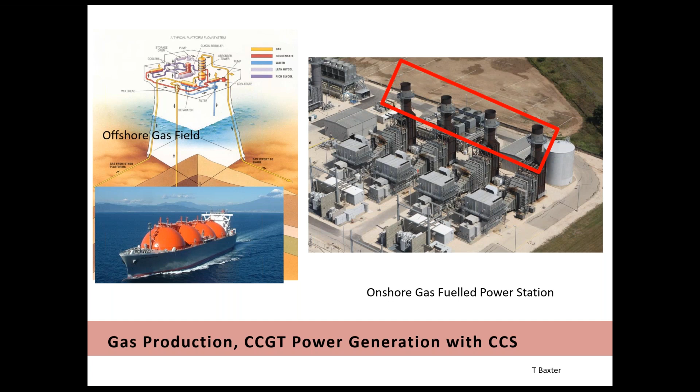Just a little reminder of a combined cycle gas turbine. We have the coupled gas turbine and the air compressor. We ingest air, compress it to combustion temperature, and inject fuel. We get a rapid expansion of the combusted gases, and the energy in the expansion is taken out through a turbine onto an alternator, where we generate electricity. Electricity generation is supplemented by a heat recovery steam generation system, where the heat in the flue gas is used to generate steam to drive a steam turbine coupled to an alternator to give us supplementary electricity.

Now, if we deploy carbon capture and storage on a combined cycle gas turbine, we introduce a parasitic load. This results from using steam that could be used for electricity to help in the recovery process of the carbon dioxide, and using some of the electricity to power the gas compressors, the CO2 compressors, and the ancillary equipment. These two red sources reduce the power output from the power plant, reducing its efficiency. It's an unwelcome introduction for carbon capture, and clearly the lower and more efficient we can make that parasitic load, the better the efficiency of the combined cycle gas turbine generation station will be.

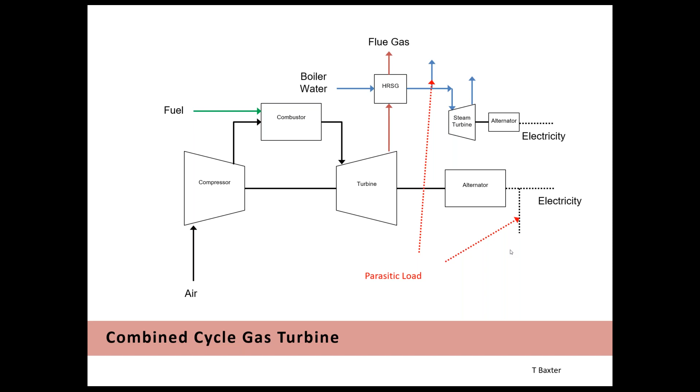So just a little bit of background on combined cycle. In the UK, this is Wales, to the west of England, and down on the south corner here, a little red dot, is the Baglan Bay power station. Baglan Bay has frame 7s and frame 9s, General Electric machines, and as you can see, the thermal efficiency is around 55 to 60%. 60% is actually a very good thermal efficiency for a power station.

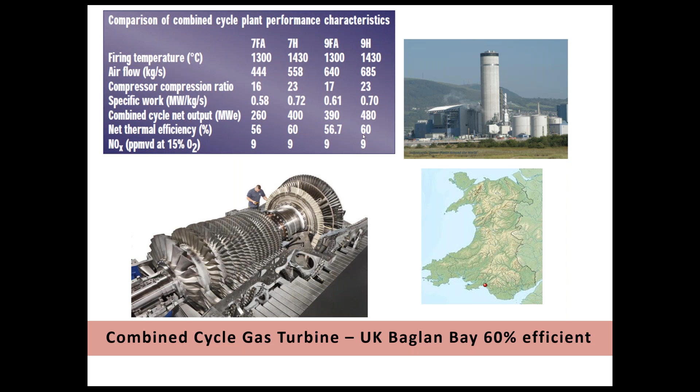Now, this is Petra Nova, one of the built carbon capture plants on a power station. It's actually on a coal-fired power station, but the function of the carbon capture plant is exactly the same as it would be on a gas-powered station. So Petra Nova is near Houston, and you can see the flue gases. This is the amine absorber taking out the flue gases, the amine regenerator releasing the CO2. We have the CO2 compressors, and somewhere there'll be an exit route, an exit pipeline for the CO2. In this particular application, the CO2 isn't used in storage, it's used to enhance oil recovery. So there's a commercial value in the carbon dioxide. The injection of carbon dioxide improves the oil recovery from nearby oil fields. So let's have a further look at the system here.

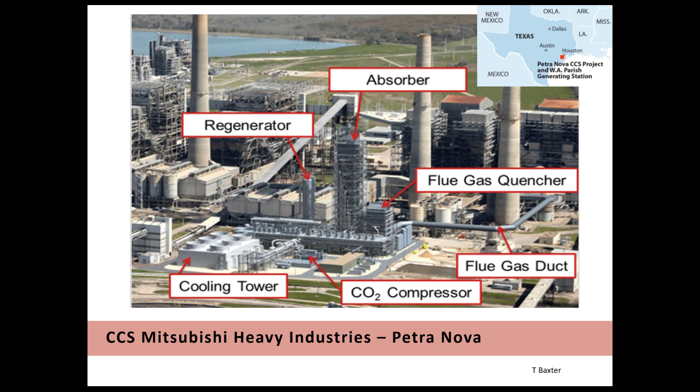So the amine unit. Now we've got here the amine reaction. So we have amine, which is an NH2 radical, that will react with CO2 and bind the CO2 to it.

So let's follow the process flow diagram. We're coming in from the power station, the flue gases, which will quench, will cool. Now we have to increase the pressure to allow the gases to overcome the pressure drop in the contact column, the amine absorber.

So the flue gases with carbon dioxide in them flow upwards. They are met with counterflowing, downflowing amine. It's called lean amine because there's very little carbon dioxide in it. The lean amine captures the CO2, and we have rich amine leaving the bottom of the column. That's amine with the CO2 chemically bound to it.

We then take the rich amine over to a regeneration column. If we follow through, we've got some heat recovery here where the rich amine is heated, and then the heat is further supplemented by a reboiler, and that drives off CO2 and water and some amine, which we condense, reflux, and we have a typical distillation process going on here, a stripping process, where the CO2 is stripped out. The amine and water come to the bottom, and the CO2 at the top goes forward to compression.

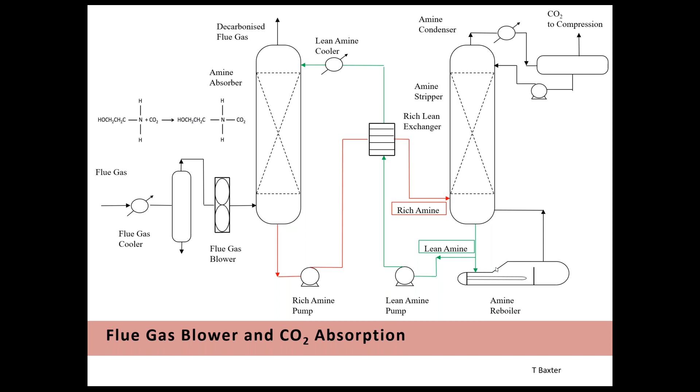And the big energy users are the amine reboiler, the flue gas blower, and these pumps are fairly large too. But the blower and the reboiler are the biggest users.

We then take the CO2 forward, and we're now going to take that to a sequestration site at the top. Generally that's done with an integrally geared compressor. What I've shown you here is 5 stages. So from the amine stripper, this will be around atmospheric pressure, can cool, compress, cool, knock out any liquids, compress again, so second stage compression.

Here we have a dehydrator, and we will remove water. Generally you remove water to prevent corrosion. CO2 and water is a very corrosive mixture, so if there's no water, you tend to have no corrosion. So we'll also have a look at the dehydrator.

But before that, we continue. So 1, 2, 3, 4 stages of compression. At this point, generally you're above 100 bar, and the CO2 is now acting more like a liquid. The last stage often gets the characteristics of a pump. The CO2 is beginning to become more incompressible than the low pressure compressible CO2.

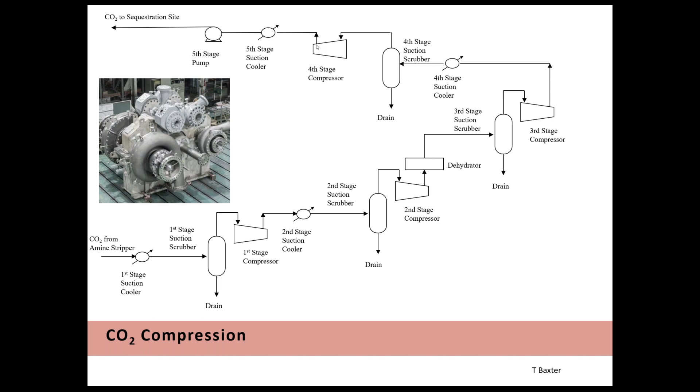Gas dehydration, what I've shown here is a molecular sieve unit. So at the top we have the wet CO2, that's CO2 that's been saturated with water, and we want to remove that water. So we have a 2-bed process or a multi-bed process here. The one I've shown is a simple 2-bed one. One bed is on duty, one bed is regenerating.

So the valves are aligned such that the wet CO2 comes in, this is open, this is closed, and the wet CO2 flows through this desiccant material. It's a metal aluminosilicate, think of it as a general silicate, that will adsorb water. And the process of adsorption is a molecule adsorbing to a solid surface, which is different from absorption into a liquid.

But in time, this bed will become saturated with water and eventually will become ineffective. So before that happens, we have to get this bed offline and drying. So whilst this is adsorbing, this parallel bed is being regenerated.

And what's happening here is around 10 to 15% of the gas is heated, maybe to around 260 centigrade. It's then routed along here and then up, and the hot gases release the water from the molecular sieve solid adsorbent. Then the hot gases with water are taken out, cooled, and the condensed water is taken off.

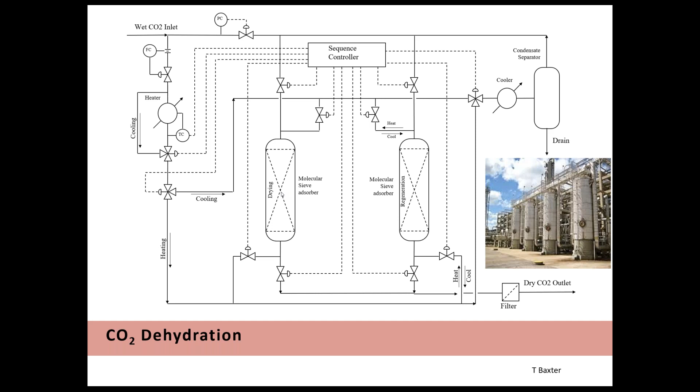So let's do a simple heat and mass balance. I'll assume that we want 1 megawatt of electricity from a combined cycle gas turbine plant, and the thermal efficiency is 55%. We'll also assume that the fuel gas we're using is methane, with a calorific value of 50,000 kilojoules per kilogram. So a simple analysis: 1 megawatt at 55% thermal efficiency using methane results in 0.036 kilograms a second of methane requirement.

If you look at the combustion reaction, for every molecule of methane, I produce 1 molecule of CO2. We know CO2 molecular weight is 44. We know the molecular weight of methane, so we can estimate the amount of carbon dioxide we're producing, which is 0.1 kilograms per second.

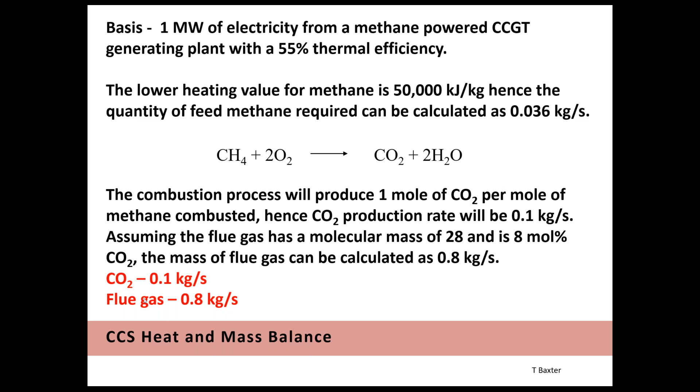Now the flue gas that I'm using, I'm assuming has a molecular weight close to air. It's got a molecular mass of CO2 of 8%. So knowing that CO2 is 0.1 kilogram per second and an 8 mole% concentration in the flue gas, I can calculate the mass of flue gas is 0.8 kilograms per second. So the key numbers here: for every megawatt of power, I'm producing 0.1 kilograms a second of CO2 and 0.8 kilograms a second of flue gas is required as feedstock.

So let's have a look at the blower. That's the compressor, the axial blower compressor that provides an increase in pressure on the flue gas to allow it to overcome the pressure drop in the amine absorber. Typically that will have a discharge pressure of 1.3 bar and a suction close to 1 bar. So we actually have a huge volume at 1 bar atmospheric pressure of flue gas that we have to compress. Although it's to a small pressure, it still requires a lot of energy.

A simple polytropic calculation, as I've shown the equations here, yields 21 kilowatts for that blower. Now remember, we're producing 1,000 kilowatts of electricity. So 21 kilowatts is now a parasitic load - that's 21 kilowatts that we can no longer produce as sales electricity.

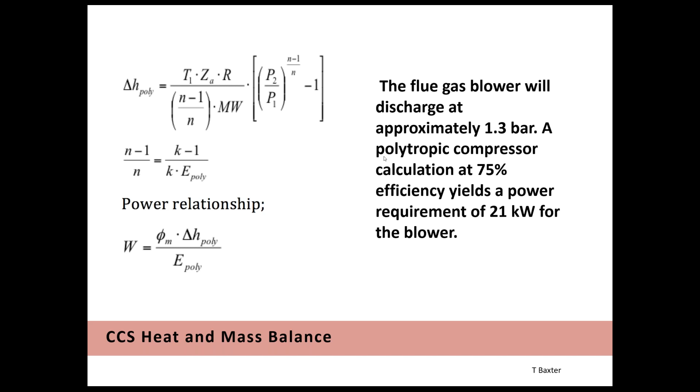Now, what I've done here is for a typical amine reboiler to regenerate the amine to get the CO2 out of it, literature shows that it's around 4 megajoules per kilogram of CO2 of heat requirement. For the numbers that I use, bottom left, I've given a source. I'll provide a PDF of this presentation, which will hopefully be made available to you all, and if you're interested, you can track down my data sources. So 4 megajoules per kilogram of CO2, and I've got 0.1 kilograms a second of CO2.

That means the thermal duty on the reboiler is 400 kilowatts. That's 400 kilowatts I have to supply as steam, and that's 400 kilowatts thermal that now can't be used to generate electricity. So what I've done here is I've used a reboiler that's around 400 kilowatts, and I'm looking at how much steam that uses, and I get a quantity of steam of 36 kilogram moles per hour. That's steam that, as I said, we can't use for electricity.

I now take that steam to a steam turbine to calculate how much electricity I could get, and I calculate 29 kilowatts. So there's another parasitic load - 29 kilowatts of lost thermal energy that could be used to generate electricity.

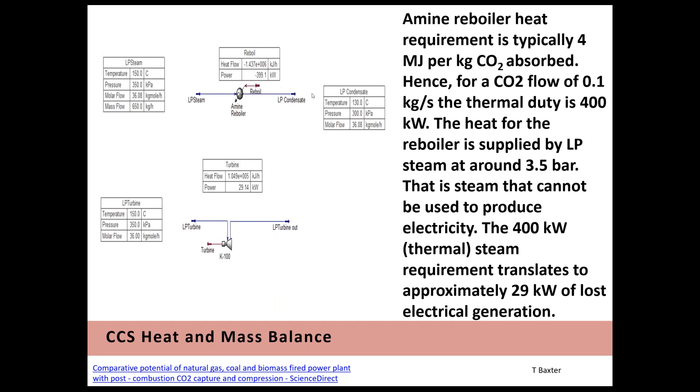Now if I move to the CO2 compressor, I've simply shown this on a Mollier chart - pressure on the y-axis, enthalpy on the x. So we've got our phase envelope: all liquid, a mixture of liquid CO2 and gaseous CO2, then all gaseous CO2 this side, and above the critical point, we're in the supercritical area. So 5 stages of compression would be: 1, cool, 2, cool, 3, cool, 4, cool, and then 5 - this is the one that behaves more like a pump. We're getting up to around 120 bar here. So if I calculate the compression power here, I get 40 kilowatts.

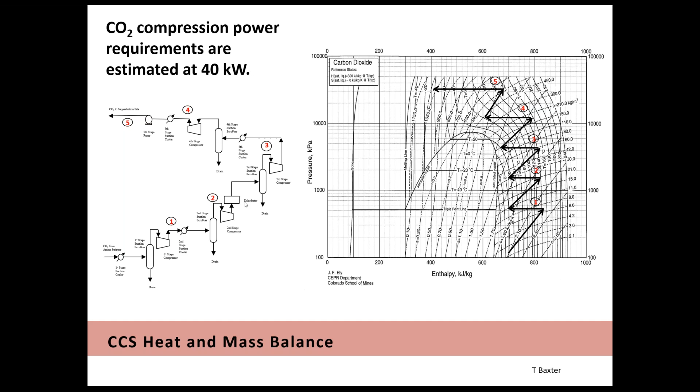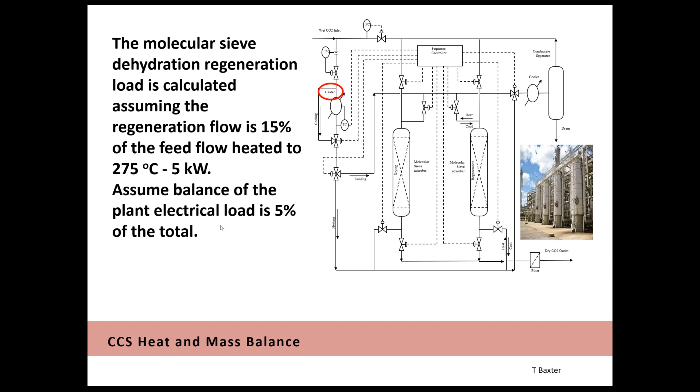The molecular sieve requires 15% of the flow to be heated to 275 degrees centigrade, so that's 5 kilowatts, another parasitic load. Then we have pumps and other utilities, the balance of plant, which I've assumed takes another 5% of power.

That adds up to the blower, amine reboiler, dehydration, and compression utilities, 100 kilowatts. Remember we were generating 1,000 kilowatts, so we now have a parasitic load of 10%. That's for combined cycle, it would be as high as 15% for an open cycle gas turbine, and approximately 20% if coal-fired. My references confirm this 10% number for a combined cycle gas turbine.

So what we want to do now is make this process energy efficient, basically reducing these numbers. Let's consider how that might be done.

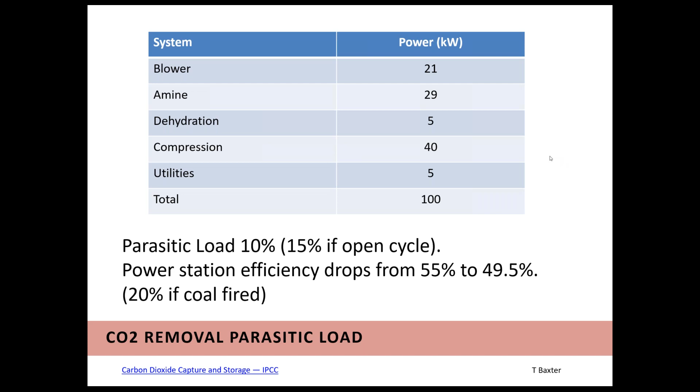Before that, one aspect is we've lost 10% of our energy as a parasitic load. To recover that means the gas supplier has to work 10% harder, producing 10% more gas to give us 1,000 kilowatts, 1 megawatt. That results in more CO2, SOx, NOx, and particulates from the supplying gas companies. That's something people don't often consider, the knock-on effect of the parasitic load meaning we have to produce more gas, which produces more CO2 and other harmful emissions.

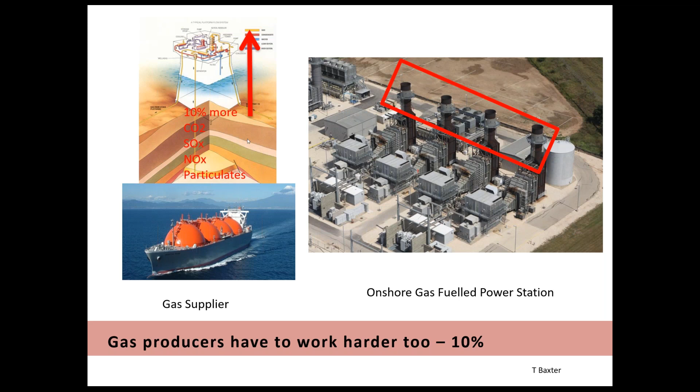So let's look at reducing our base case energy. Firstly, the blower. The blower is there to overcome the pressure drop in the amine absorption unit, induced basically by the packing inside. We have gas flowing through with CO2 in it, counterflowed by the amine, through structured packing. I'm using Sulzer packing here, and Sulzer and others have developed packing with very low pressure drops.

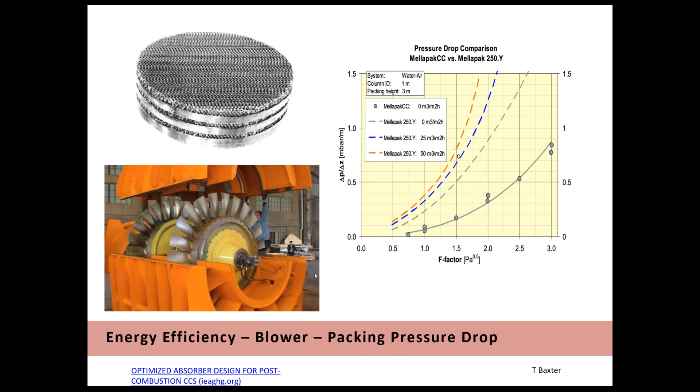Looking at the blower, I'm considering the polytropic head. P2 upon P1 is discharge to suction pressure, and I can lower that. Another thing I can do is reduce the temperature further, which reduces the polytropic head and in turn reduces the power. Power is mass rate times polytropic head divided by efficiency, so the more efficient I make the blower, in terms of hydraulic or overall efficiency, the less energy I'll use.

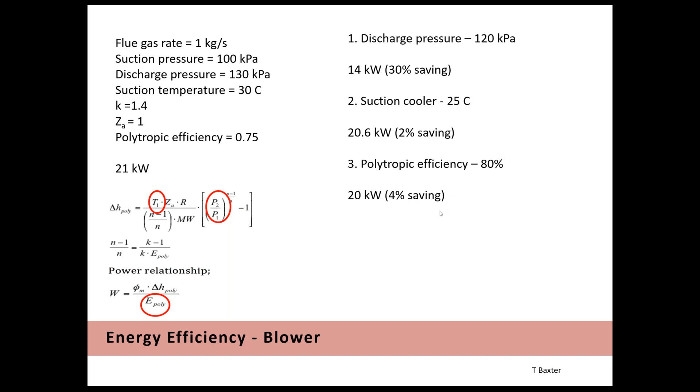I've dropped the discharge from 130 kilopascals in the base case down to 120, 1.2 bar, and get a big saving, from 21 down to 14. If I cool further, from 30 down to 25 in the base case, I get a little saving. And if I design for a high efficiency compressor, I get another saving, 4%. But the big saving here is the low pressure drop packing.

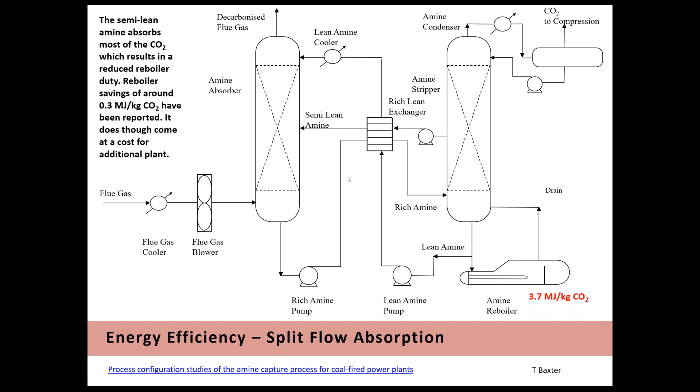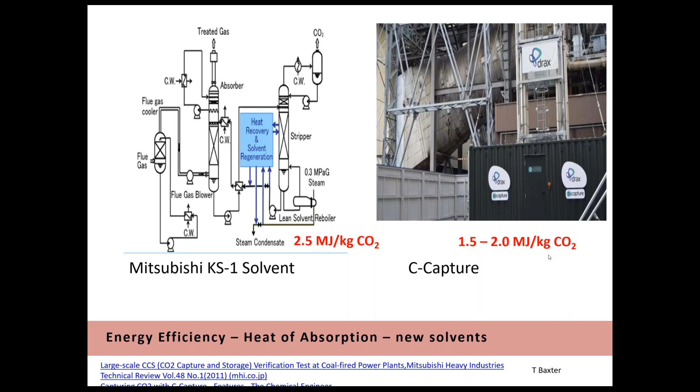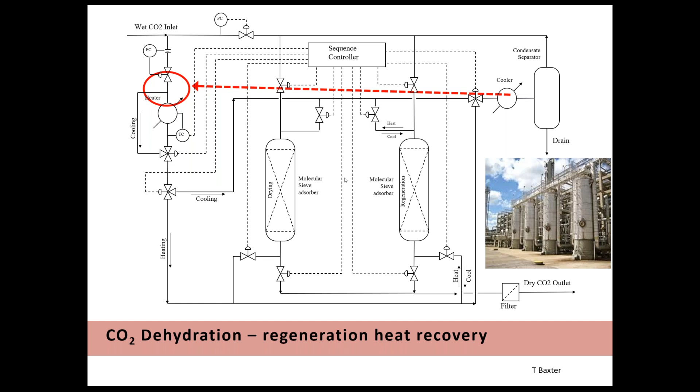For the molecular sieves, we could look at some heat integration. When this bed has been regenerated and there's some hot gas coming over, rather than just cooling that, we could perhaps use some of this hot gas to preheat, allowing us to reduce the load on the regenerator. So there's another energy efficient option we may deploy.

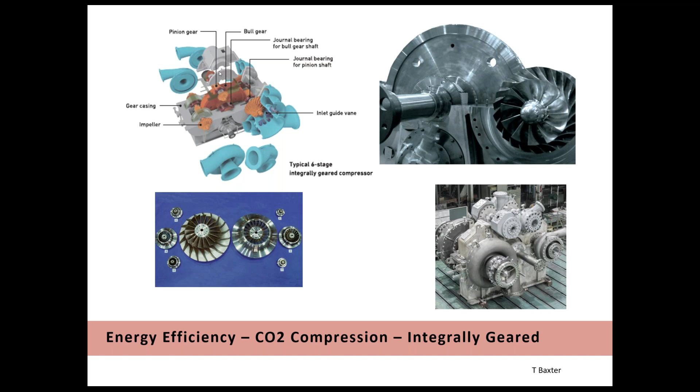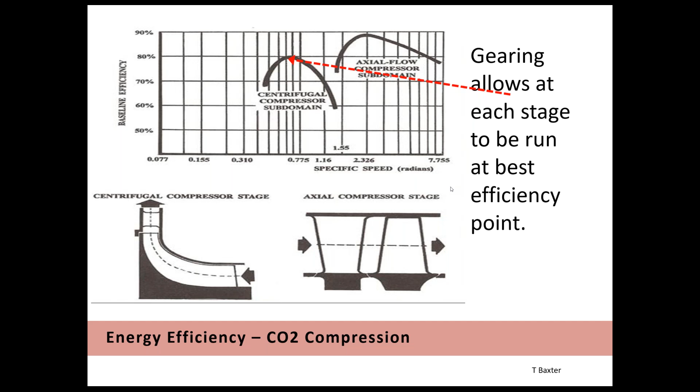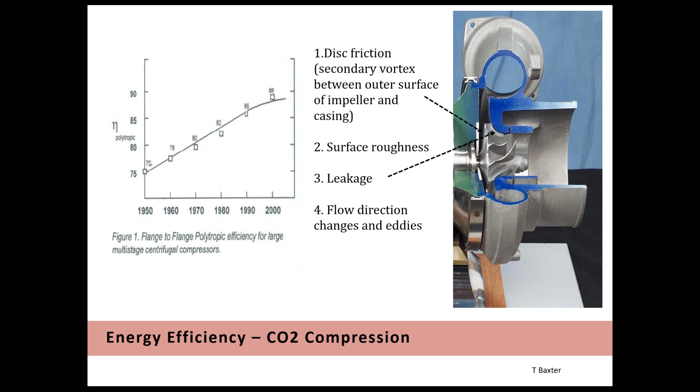So let's have a look at the CO2 compressors. The duty is 1 bar to 120 bar aftercooler of 30 degrees C, and the pressure drop between stages, from discharge of one compressor to the suction of the other, I've taken as 1 bar. The base polytropic efficiency is 75%, and that gave us a base case compression load of 40 kilowatts.

I'm now going to have a look here again. If I can reduce the differential pressure between stages down to half a bar, I can get a 6% saving - that's pressure the compressor doesn't have to recover. Every time there's a pressure drop, a compressor has to recover that lost pressure. If I drop the discharge temperature down to 25, the feed temperature for the next compressor, I get a 3% saving. If I move the efficiency up to 80%, that's a 6% saving. And if I can lift the suction pressure, which is the regenerator pressure, to 2.5 bar, I can get an 11% saving, because that's a large reduction in overall compression ratio - before it was 120 to 1, now it's 120 to 2.5.

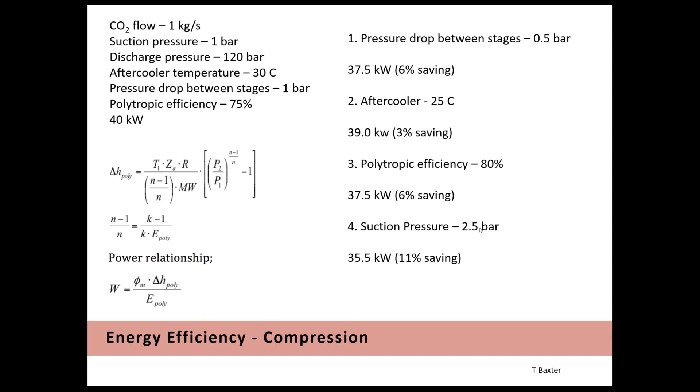Other places I might look for efficiency are very high efficiency motors, the use of dry gas seals, and maybe the use of magnetic bearings instead of conventional roller bearings.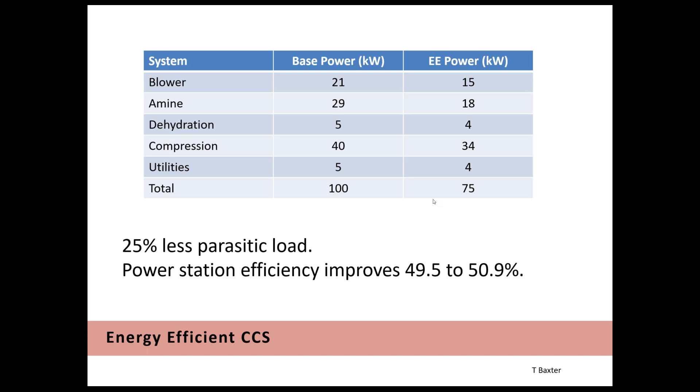I'll introduce another thought to you now - a device part funded by the US Department of Energy, called a Ramgen Compressor. This works on a principle similar to a jet aircraft that is supersonic. We have a casing, and inside it rotating is a kind of angled shape. As it rotates, the CO2 is rammed into this gap, where it reaches a speed of around Mach 2, then expands out on the discharge side, and we recover that velocity as compression or pressure energy. The claims, and it's been demonstrated, are that this machine can give you a 10-to-1 compression ratio.

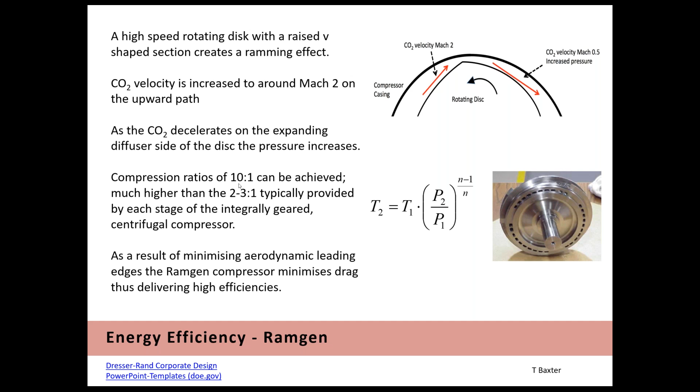Now, that's very significant. Instead of having, remember, 1, 2, 3, 4, 5 conventional integrally geared stages, if we go for a 10-to-1 compression ratio, I've got 2 stages of this supersonic compressor.

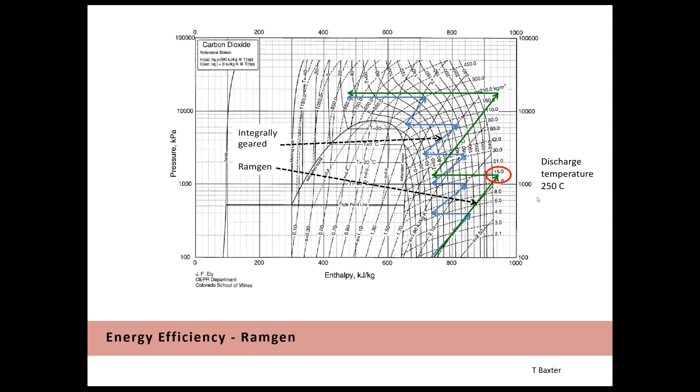Very interesting is the fact that I now generate temperatures of around 250 degrees C, so I've got some high grade heat. Here's our 2 compressors, the Ramgen supersonic compressors, generating something like 250 centigrade. What I've done is taken that heat and generated steam on these 2. I've looked at the amount of steam I can generate, and it's about thermally 600 kilowatts, and that will reduce the load on the reboiler, the Amine reboiler, by about 0.6 megajoules per kilogram. So again, a very significant energy saving, where I'm integrating the heat of compression from the CO2 plant back to the reboiler on the CO2 capture plant.

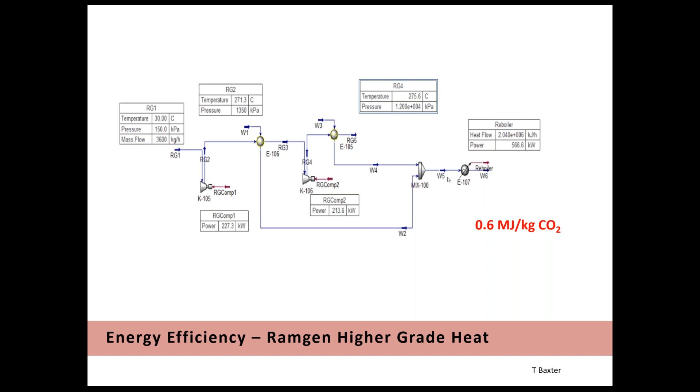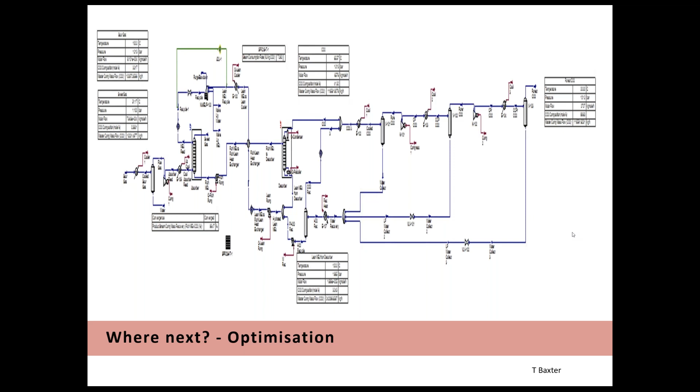You won't be able to see this, but this is one of my models. Some of you might recognize this as Aspen HYSYS. One aspect, and I'll try and get a student working on it, is to overlay an optimizer, a multivariable optimizer, to see if we can get any more energy saving.

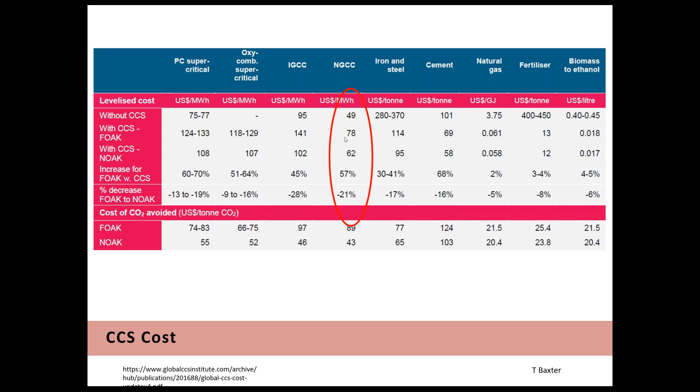So a few more slides left. Obviously, a carbon capture plant is going to cost money. This is from the Global CCS Institute, these are their numbers. For a natural gas combined cycle plant, the base case is $49 per megawatt hour. If we deploy carbon capture, it goes up to over 70. So it's a very significant cost increase by deploying carbon capture.

In the UK, the largest scheme proposed, so you recognize the UK, this is where I live up here, and the gas plants are north of Aberdeen where I live. It was proposed a carbon capture plant would go on the power station adjacent to the gas plants, called the Peterhead Power Station. The gas would be captured, CO2 removed, and then taken to an offshore platform that had CO2 metallurgy in its construction, CO2 wells, and use that as a sink for the carbon. It was to be deployed in one train, one CCGT train, the combined cycle train, around 440 megawatts, 48% efficient.

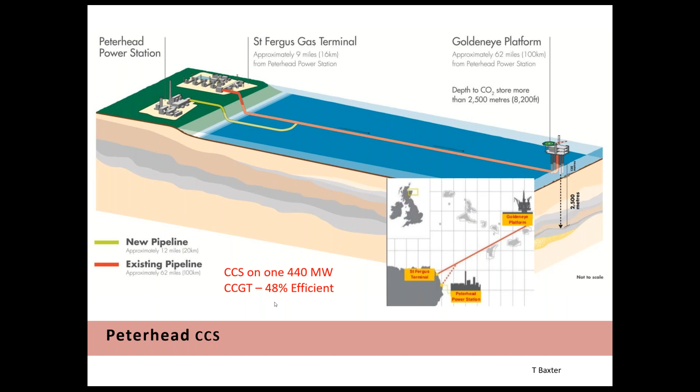But we know power station CCS is very expensive, and there's no commercial driver. All CCS does is cost money. So maybe no surprise, the project was cancelled.

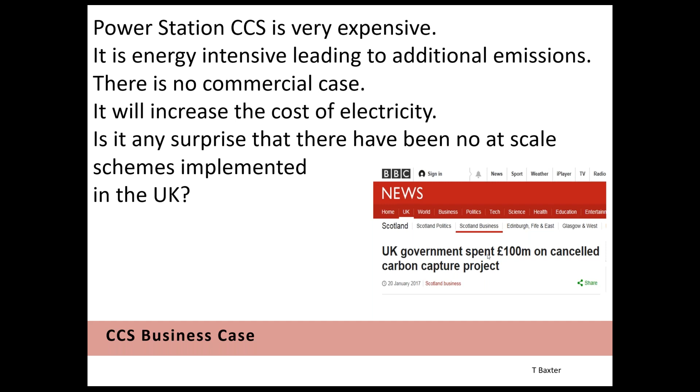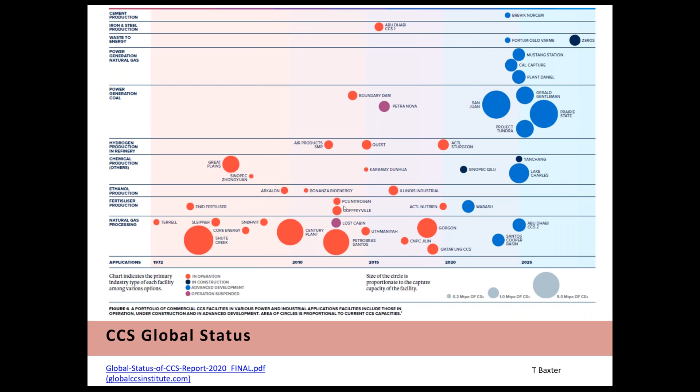This is the status of carbon capture plants worldwide. We've got power generation, and the reds are in operation. The one I want to draw your attention to, in power generation gas and power generation coal, is Petra Nova. I mentioned that at the start. We see that's purple, operation suspended, so it was working and they've suspended it. The reason is Petra Nova captures carbon to be used to enhance oil recovery. Oil prices have dropped, they are recovering somewhat, but they dropped to a point where it wasn't commercial to operate the carbon capture plant on the coal-fired power station. So the plant's been mothballed.

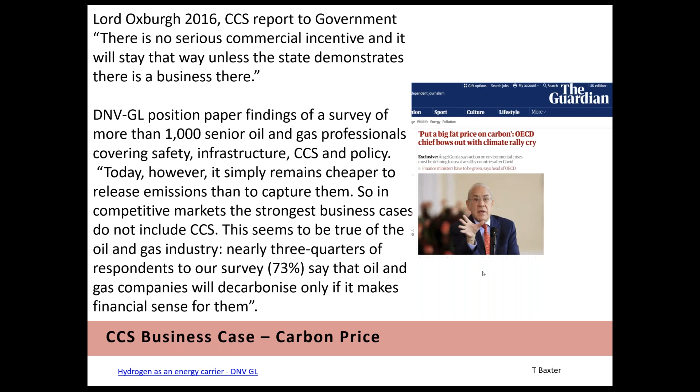But there were some worrying words here. There's a quote from one of the economists: proponents of these projects are selling an unproven dream that in all likelihood will become a nightmare for unsuspecting investors. In the UK, Lord Oxburgh said CCS, there is no commercial incentive, and until there is, no business case. I noticed a DNV paper looking at carbon capture with hydrogen, and this quote here is: the oil and gas industry, nearly 3/4 of respondents say that oil and gas companies will decarbonize only if it makes financial sense. And here's the outgoing OECD president saying, put a big fat price on carbon to make carbon capture commercially attractive.

So that's me covered the material I want to cover. Hopefully you found it interesting, some useful information here. I've got a series of articles in the Chemical Engineer, many of them called Energy Saviours, and there's one on the parasitic load for carbon capture. You might want to have a look at that, or perhaps look at some of the other articles I've written on energy efficiency. So once again, thank you for your attention. I hope you understood the Scottish accent, and I'll hand back to the chair and see if there's any observations or questions.